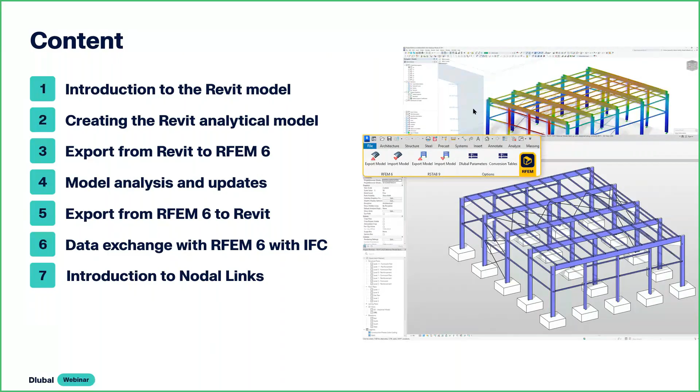Now I'll switch over to Revit, and here is the model I've prepared. It's a basic steel structure consisting of steel frames with some coupling members and some X-bracing. For my columns, I have my cross sections - most are W shapes, with steel A992 assigned for the W shapes, and I have my X-bracing assigned.

This is the structure that you would create, probably from the architect. The plan is to help the structural engineer by exporting this structure to RFEM 6.

So to do that, first we want to go into the Dlubal tab. This tab, or our Dlubal plugin, is our direct link. This is what you will want to install after installing Revit. It needs to be installed manually, but once you do, you'll have these 6 buttons here.

The first 2 buttons are for exporting and importing the model between RFEM. Then you also have the same options but for RSTAB or other programs. And then you have these last 2 buttons - the main one is the conversion tables.

So I'm going to open up the conversion tables and go over these quickly. The conversion tables are what map the sections and materials between Revit and RFEM. Since Revit and RFEM don't share the same section names and materials, they need to be linked together, and that's what the conversion tables are for.

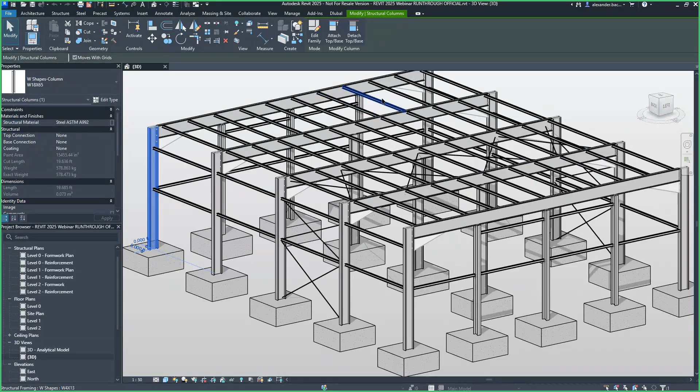So to do this, first we'll go to the Analyze tab. And under the Analyze tab, there's a button called Analytical Automation. This is what's going to help us create that analytical model.

Here you can see the first option is we can go from an analytical model to a physical model, or we can go from a physical model to an analytical model. This is the option we want to go with today.

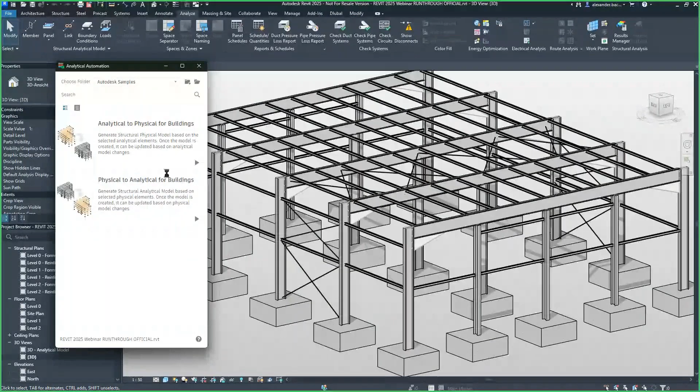So I'll click on that, and you'll see some additional options come up. The first thing we want to do is select what we want to convert graphically, so I will select that graphically in Revit. Now that that's selected, we have a next option here.

This is a tolerance. Right now with this custom tolerance, basically if a member is within this tolerance, then it will be connected - the analytical member will be connected within this tolerance. This is based off of a length, and my units right now are in feet, so this is 1 foot.

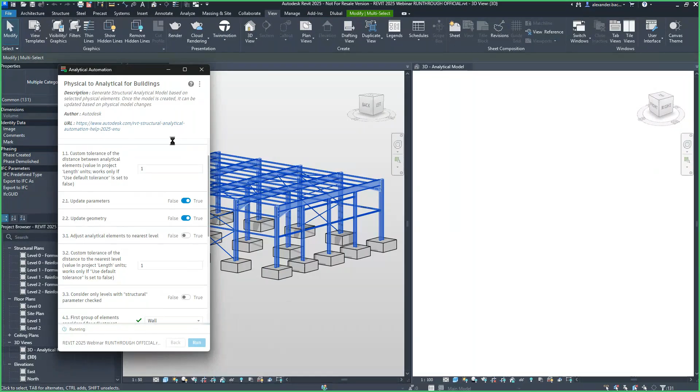So let me also open the analytical model and put them side by side. Let's run this to see what 1 foot looks like. I've created - you can see the analytical model based off that 1 foot tolerance has been generated.

You can see that my coupling members here connected to the beam because they're within that 1 foot. You can also notice some other members have done the same. If we change this to something like 0.8 feet and run it,

now you can see that those members have straightened out and everything looks better, but you'll notice that my coupling members are still kind of floating here, and some of these other members aren't completely straight. Also I have this cantilever at the end of my column as well.

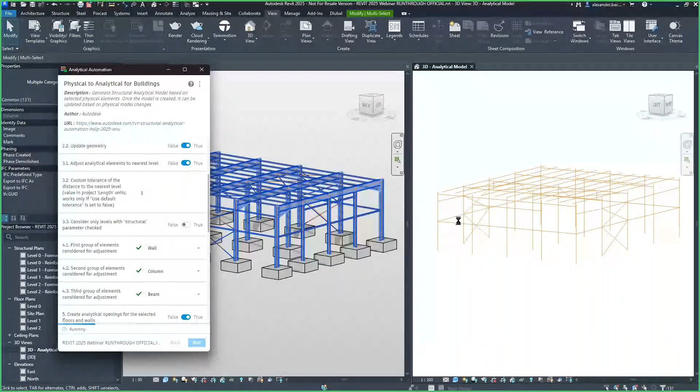So there's another option we can use to fix that, and that is the adjust analytical elements to nearest level. Once I turn that option on and run it, we'll see what that looks like. That'll adjust all the members to the levels that are created in Revit.

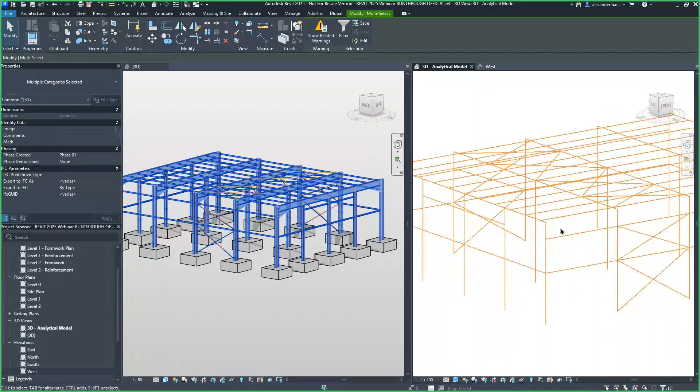For example, if I look at the west view, all of the analytical lines will now be adjusted to these levels. So now everything looks better - everything is straight and all of my members are connected and everything looks good.

The only issue with this is now it's not super optimal because my analytical lines are now resting on the flanges of my beams, whereas I would like these analytical lines to be in the center of my beams.

So what I can do is there is another option that can help with this, and that is called consider only levels with structural parameter checked. I can check this on, and all of my analytical lines will adjust to any level - if I click on one of these levels, any level that has this structure option turned on.

So what I'll do to utilize this option is I'll create some copies of my levels and activate that option. This first level, I'll just go through, create a copy, and then I'm going to move that copy down like so.

And with that copy, I'm going to rename it, and check on the option structural. Then I'll do the same thing with this level: create a copy, move it down, rename it, and check on that option.

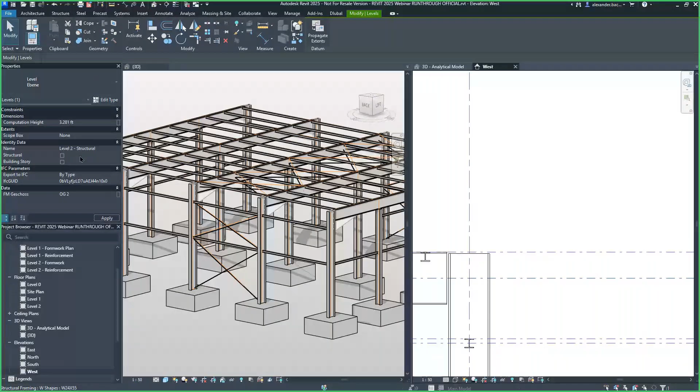Okay, so now once those are created, we can open that panel back up, and we can turn on consider only levels with structural parameter checked. Now this option does also come with another tolerance, so let's see what it looks like.

For example, if I exaggerate that tolerance, we can see how the tolerance works. So if I turn that on, you can see that members down here have been sucked up into this level, into this level, because they're within that 10 feet that I entered.

So that's not a great value. So what if I do something too small? Now you can see that my coupling members didn't get into the level. Some things aren't in there.

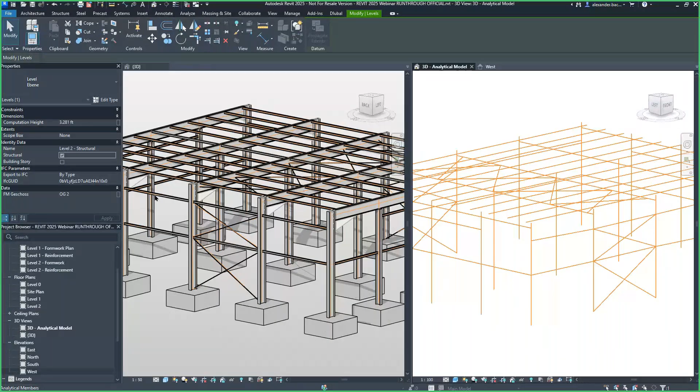So the best thing to do, well, one is the good happy medium, so we'll run it with 1 - that's how that tolerance works. And so now our analytical model is created, and you can see that my analytical lines are within the center of my beam.

Everything is connected. All my cross bracing, they're all meeting at the same joints and everything. So that's how you can create an analytical model within Revit using that tool.

Now that we have our analytical model, there is other model data you can add, like boundary conditions. If I go back under Analyze and Boundary Conditions, I could add in some point, line, or area supports in my analytical model. I can also add in loading, like point loads, line loads, and area loads, along with load cases and load combinations.

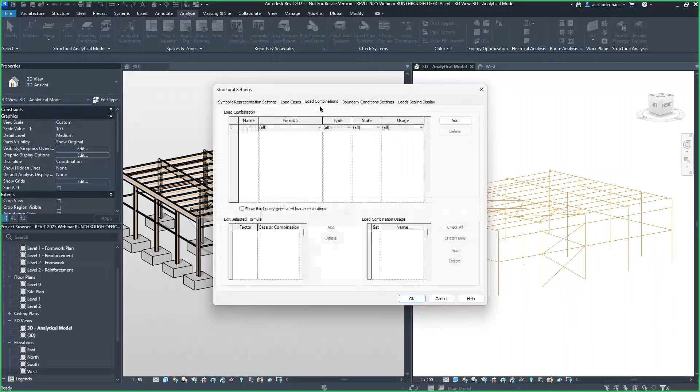All of this info can be carried over into RFEM. So if you wanted to have your Revit model be your all-in-one model, doing your architectural detailing and also running the structural info, you can do that. Or you can simply leave it up to the structural engineer and export the analytical model into RFEM. It's totally up to you.

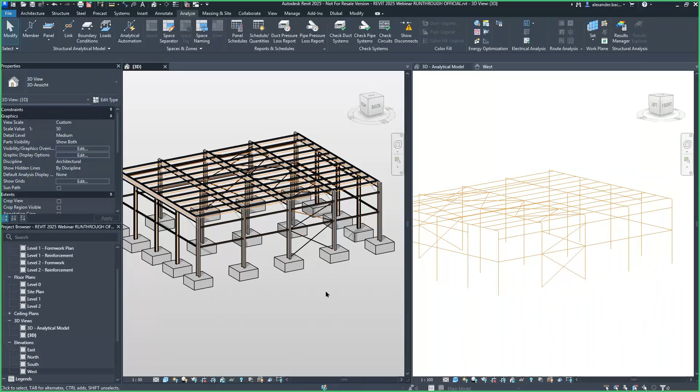So now we'll go over exporting this to RFEM. I'm going to move my windows over, go up to Dlubal, and go to Export Model. We want to export this model to RFEM 6.

You can either create a new structure and have RFEM create a new file and import the model in, or you can overwrite an existing structure. I'm going to create a new structure and have RFEM create a new file.

On top of that, I can also have RFEM open up a previously saved template. I have a template I've created from a previous model, and it's really easy to do when you have the model you want to use as a template - it could even be a blank model. You go to File and then Save as Template. Then all you need to do in Revit, or in the Dlubal plugin, is point your computer to wherever that file is, wherever that template is saved. So now when it opens a new file, it'll open that template instead of a completely blank file. That's great if you want to save things like load combinations.

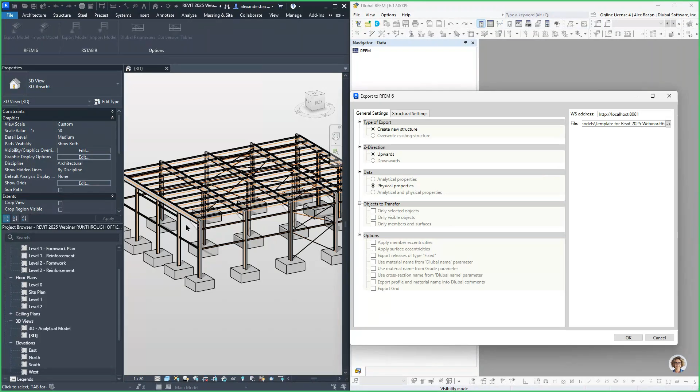I can also set the Z direction to upward, which is what I'll keep it as. You can choose between the analytical, physical, or both to export. I'm going to choose the physical - the physical model and the analytical model in Revit can have different model data, like different sections or materials compared to the physical. I'm going to choose the physical because it keeps the member rotations correct, which is good.

For objects to transfer, you could only transfer selected objects if you like, or only visible ones, so you can play around with that. Lastly, the grid can be exported, but I'm not going to.

Second tab is structural settings - I'm exporting model data. You can export the loads like I said, but I don't have any defined, so I'm not going to. Once I click OK, that'll start the process of exporting. This is where Revit and RFEM communicate with each other via API. This is a good time to mention that both programs need to be installed on the same PC - this is a requirement of the Dlubal plugin.

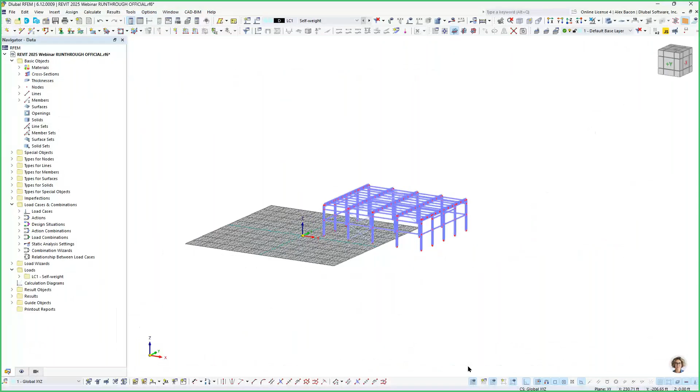Now that the export is done, we can see the model over here in RFEM. The model has been imported, and the first thing that's always good to do when you first import a model is check it visually - make sure your materials have been correctly mapped over along with all of your sections.

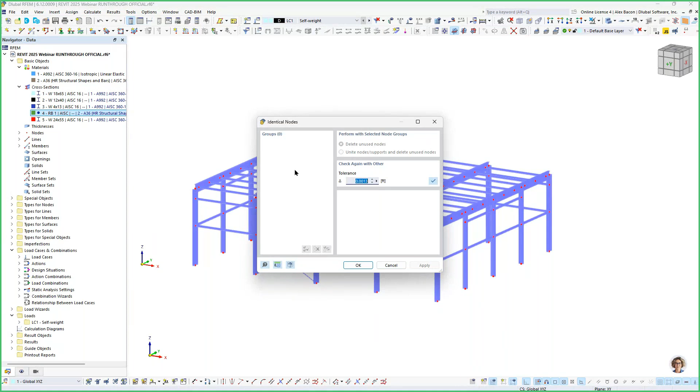There are also tools within RFEM that can help you do some model checks. If we go up to Tools, then Model Check, then Identical Node, this can check for identical nodes within this tolerance. If there are any nodes, more than one, that lie within this tolerance, they'll show up here. For example, if I type in 5 feet, you can see what that looks like and how it detects the nodes, and then you can choose what you want to do with those identical nodes.

The other tool we have for model check is overlapping members. So we can also check for overlapping members. I don't have any, but that's always a good thing to check for.

Now with this model, what we want to do is prepare to run a simple self-weight check, or self-weight load, just so we can check the results.

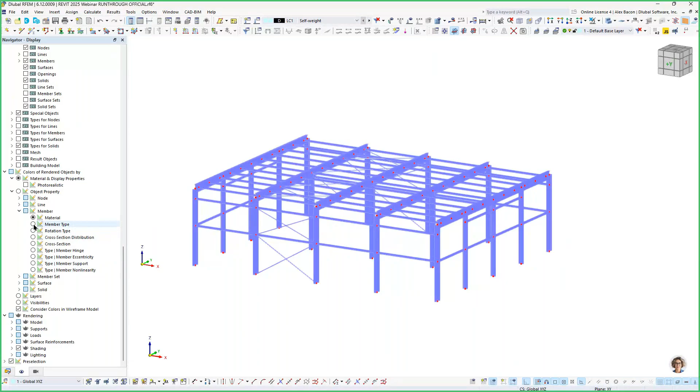To get a better understanding of the structure, I'm going to render it according to the section views. So I can go to cross-section and get a nice view of each of my cross-sections, which are color-coded. You can change the color of any of these. That's a good render.

We can also render it according to member type, so I can see all of my members are set to beam. Another good one is member hinge, so I can see that I don't have any member hinges defined. So all of my connections right now are completely rigid, with all 6 degrees of freedom.

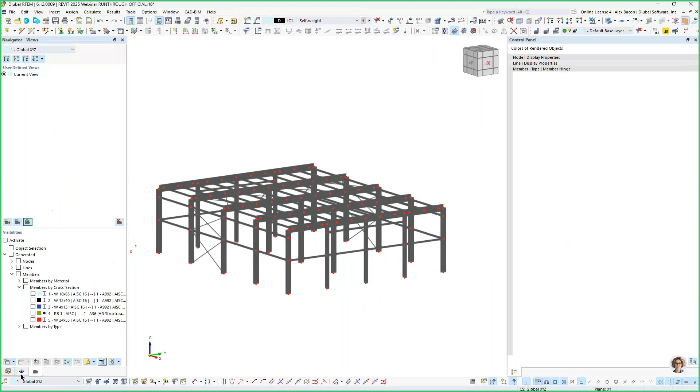Now I would like to edit some of my member types. I'm going to go to my views, change this back to member type, and isolate my cross bracing. I'll highlight all of those and change them to tension, so now these members can only take tension forces.

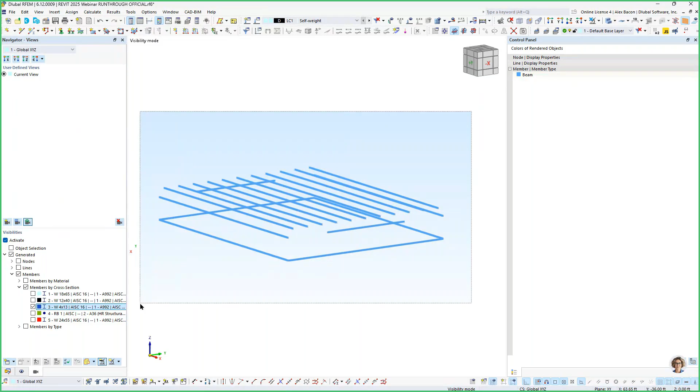Next, I want to change all of my coupling members to truss. I'm going to highlight all of my coupling members and change them to truss, so now those members cannot transfer moments. They have a pin connection.

Lastly, I would also like to apply hinges to my wall and center columns, so I'll create or show those. I only want to apply some member hinges since we have pin connections here at the top of my columns. I just realized I forgot to mention the connections.

Yes, I have some connections defined in Revit. For the columns and beams, I have some plates and fasteners, and the columns framing into the beams here are pin connections, so I'd like to consider that in RFEM.

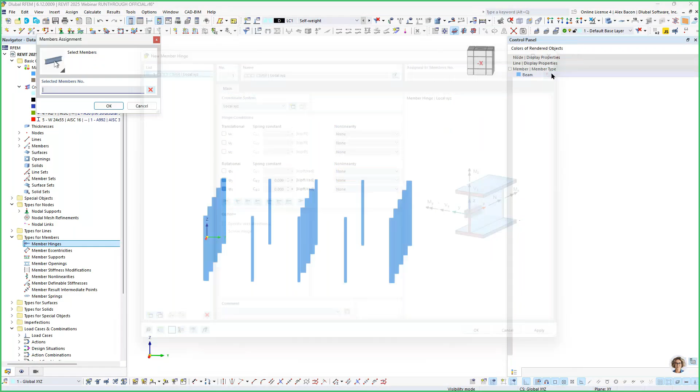So I'm going to go to the data navigator, go under types for members, and double click on member hinges. I'm going to create a new member hinge—it's a moment release. Then I can simply assign these member hinges to the tops of my members here and click OK again.

Now you can see those white pins at the top, telling me I have member hinges there. Under the member hinges display, you can also see what that looks like with member hinges assigned.

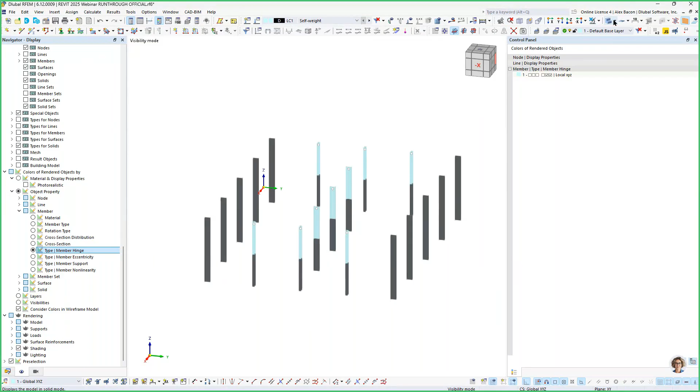Lastly, before we can run the calculation, I am going to exit out of this view. I also need to add nodal supports to the bottom, so I'll create or assign a nodal support, a hinged one, and highlight all of my nodes there.

So now this structure is ready to run a self-weight load case. I'm going to run the calculation.

And it's done. So now the best thing to do is check the deformations—deformations really tell you a lot about the structure, and right now ours are looking good. I can change this to colored section and a wireframe render. Right now we're getting a max of 0.07 inches, which is in our coupling members.

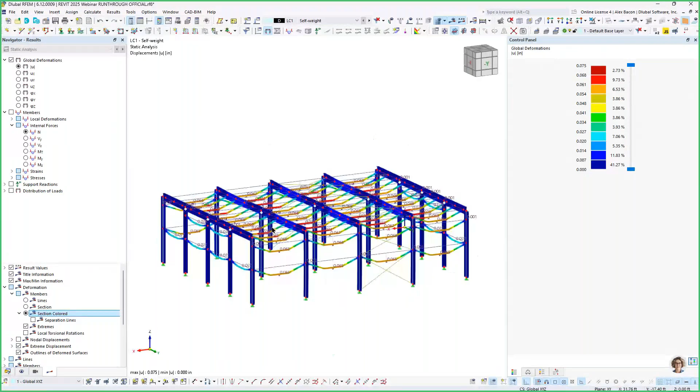We can also check the member internal forces, like the axial forces on the columns, and the moments on our frames here. I can isolate those and get a better view. We can see we get positive moments within the center spans and negative moments where our columns are framing in, so it looks like everything is good and correct with our model.

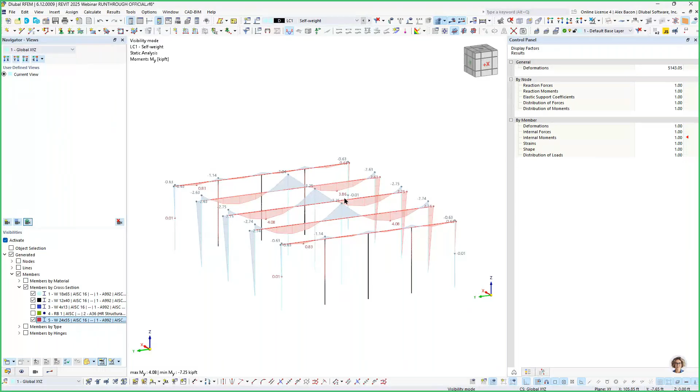That's good to see. Theoretically, the next steps for this model would be to add in some more load cases and loading, have those load combinations created automatically, and then run through the design with our design add-ons. I'm not going to do that with this model today to save time—I would like to move forward and import this model back into Revit.

So let's say you ran the design and you changed some section sizes or materials, and you want to update that in the Revit model. It is possible to simply update sections or materials within the Revit model, but if you made any geometrical changes, you would want to simply import the whole model back in.

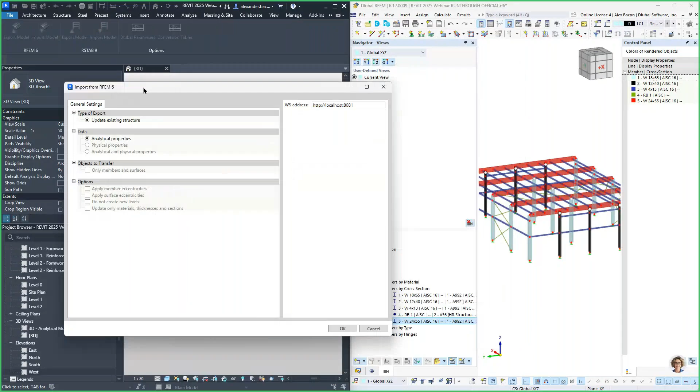So I'm going to delete my Revit model and go up here to import model. Again, we want to update the existing structure. We can't create a new file within Revit automatically. You can import the analytical model, the physical model, or both the analytical and physical properties.

I'm going to choose both. There's also an option if you only want to update materials, thicknesses, and sections, so that option is there if you don't want to wipe or delete the model in Revit. And now I can run that import.

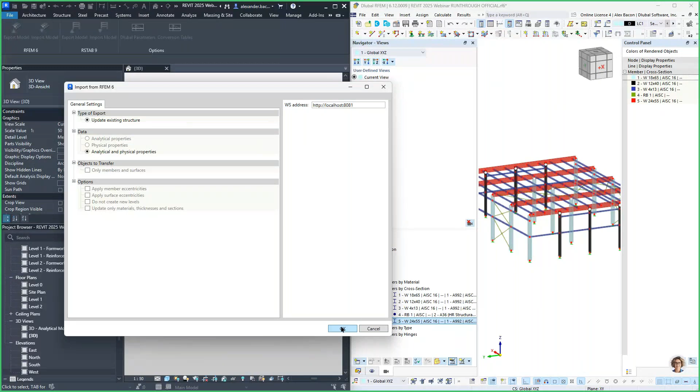You'll see the status down there in the bottom left of RFEM. This window is what it'll look like if you don't map every section in the conversion tables within Revit, and this will simply come up. So it's saying that my cross bracing section is not mapped to anything.

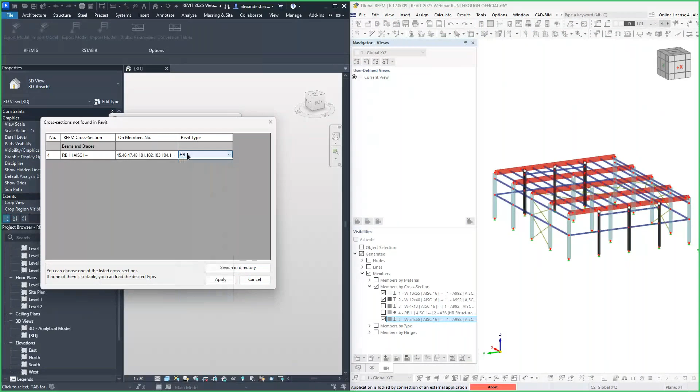It's really easy though—any of the families you have installed, you can simply go down, choose that section, and hit apply to map them there if you don't have them in the conversion table.

So the import has succeeded, and you can see we have imported both the physical and the analytical models. It's great because if I show the analytical model, I have my nodal supports in there automatically from RFEM.

So all of that model data in RFEM can be saved in here. I can even check my members, and I can see my member end conditions—those hinges, even from the truss members we defined, come in. You can change the degrees of freedom for these supports if you wanted to here. That's all the info that comes with the analytical model.

So that's basically the double link—that's how you can use the double link to import and export models and analyze them between Revit and RFEM.

So next, I would like to go over the data exchange using IFC.

Often Revit and RFEM 6 are not being used on the same PC. As far as we know, Revit cannot simply export the analytical model via a shared file extension, so therefore we can just focus on the physical model and export that in the IFC format.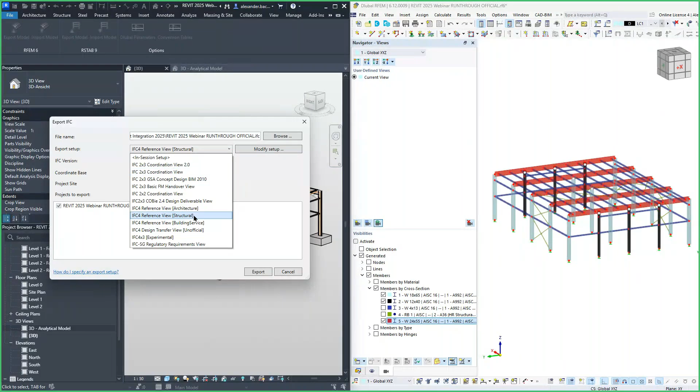So let's open up File, go to Export, and hit IFC. We can choose where we want to export that IFC on our computer, and then choose which IFC version or type we would like to use. Right now we just support IFC 4 reference view and IFC 2x3 coordination view. I'm going to choose IFC reference view and run that export.

It's pretty quick. Now I can go to that file on my computer and open it up in BIMvision.

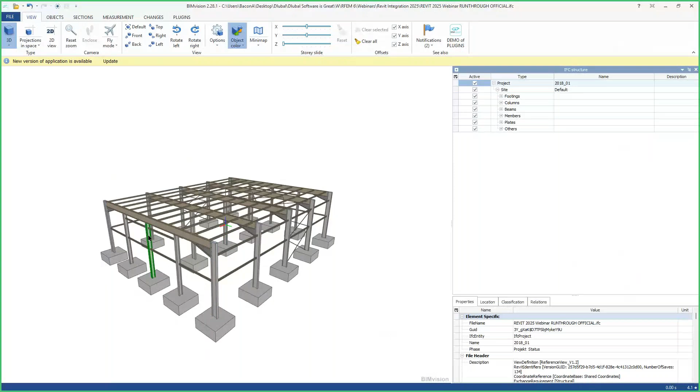Once open in BIMvision, everything comes with it—all of my connections are here. I click on a member and I can see every member comes with the section that was assigned to it, along with the material. So all of that info gets transferred through the IFC, which is great.

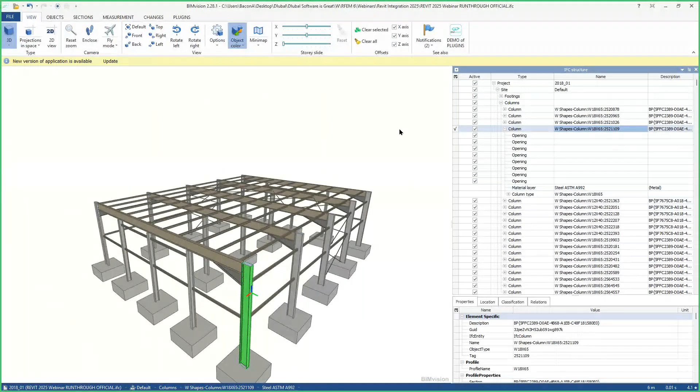So now I would like to import this into RFEM 6. I'm going to open up RFEM 6 and go to File and create a new file. Then I'm going to name this file IFC import Revit, click OK, and create that new file.

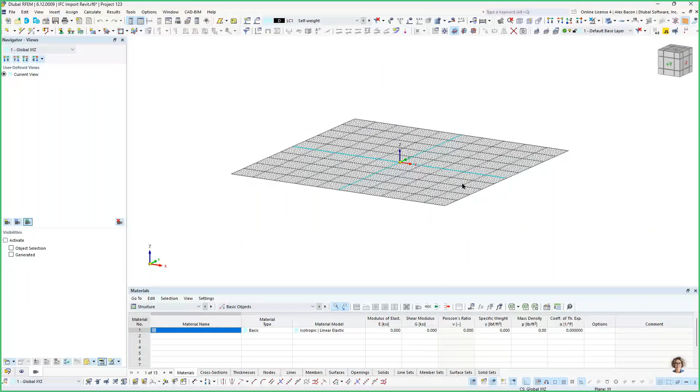Now I can go to File, Import, and Import IFC. I'll choose that IFC I just created, click OK. You can check or decide what coordinates you want the model to be placed on, and now that IFC model is within RFEM.

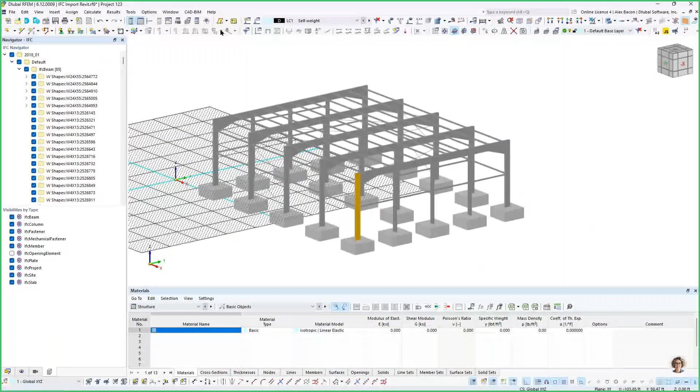So what we can do now—you can see I have all of that IFC info on the left-hand side here. I can even click on a member and turn on my IFC properties panel on the right-hand side, and you can see all of that IFC info comes with it: the section name, also the associated material. So materials and sections come with this, which is great.

And right now though, the problem is that these are just IFC objects.

If I go into my project manager or data navigator, you can see I don't actually have any RFEM elements. I don't have any members or anything.

So what we need to do is convert this IFC model into an actual RFEM model, and to do that, we also have a conversion table with RFEM.

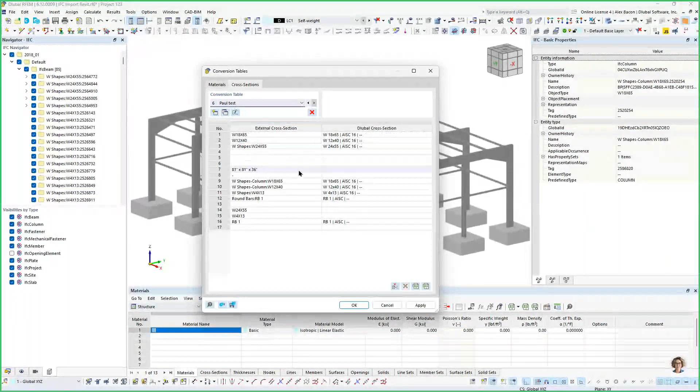If I go up here to CAD BIM and open my conversion tables, we have the external name here along with the Dlubal material name, and under sections, the same thing. It's really easy. You don't have to set this up, but if you don't, you have to assign these sections and materials manually.

But it's really easy to set this up. With this cell, you can use this graphical button to select the section or material name within the IFC properties. You can type it in manually, or create an XML file and save it to share with colleagues. And you only have to do this once.

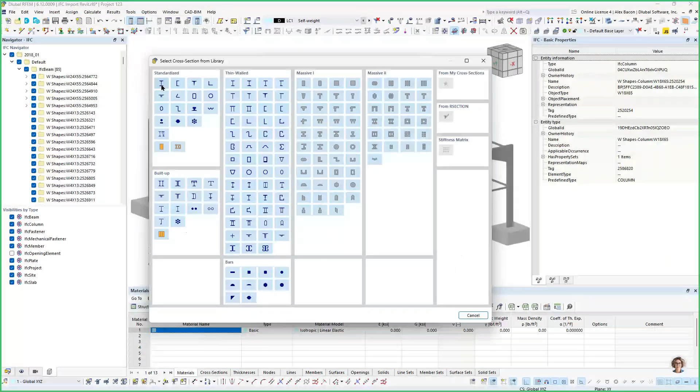So it's really quite simple to set up, and you can have multiple conversion tables. So I set this up, and in this cell you can simply go into the material or cross-section library that RFEM has, and that's how you get the name. You don't even need to know the Dlubal name. It's pretty simple.

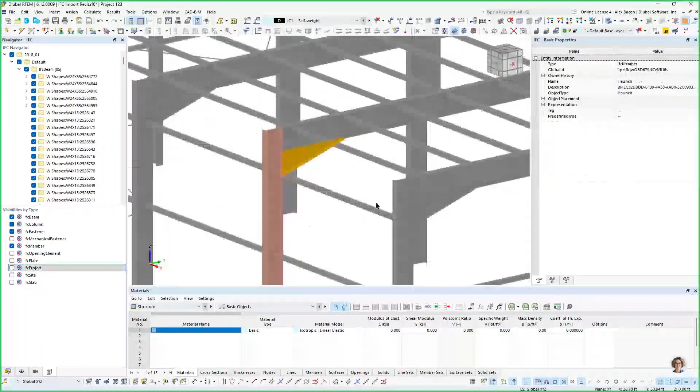So I have that set up, and now what I can do is hide these IFC elements I don't need anymore. We'll hide the connections and fasteners. You could convert these connections and fasteners, or probably mostly just the fasteners, into straight elements if you wanted to, but it's not really practical, so I'm going to hide all of them.

I can't hide these end plates here because they're linked to my cross bracing. That can be changed in any IFC file, but for mine, it's a little bit different. So I'm just going to hide my plates here, like so.

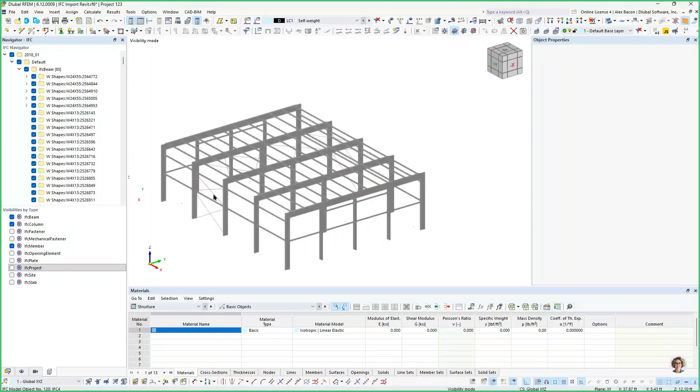So now we have just the members we want to convert. I can simply highlight this whole model and right click on one of the elements. You'll see we have a couple options for the IFC conversion: convert into straight or curved members, convert the element into a surface, or convert it into a solid. I'm going to convert it into a straight member.

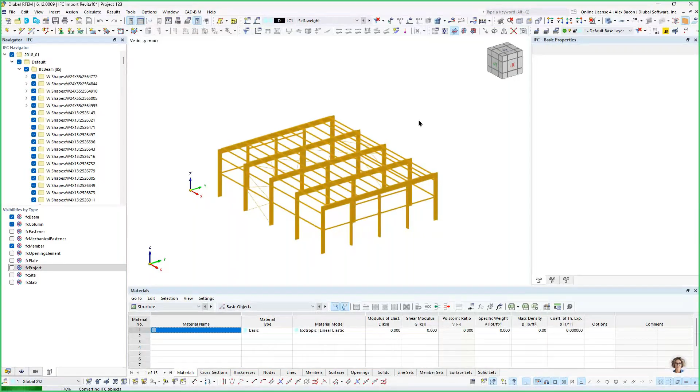So now all of my members have been converted. All of my sections, again, are mapped to the correct members along with my materials. So now I can hide all of my IFC elements, and we can just work with the model in RFEM.

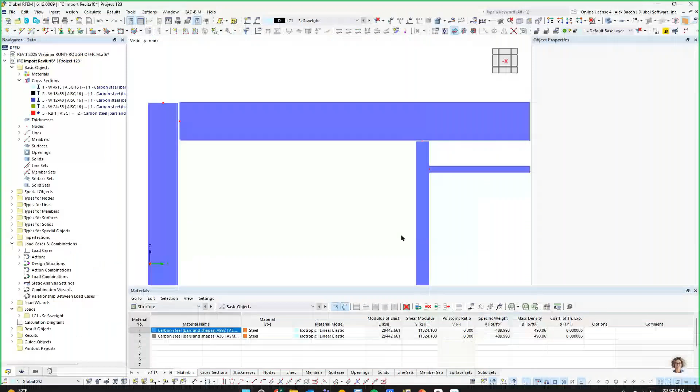Now, the issue is that we still have the gaps here. Everything is laid out the same as it would be in the IFC model, so that gap there is because we had the plate there, and all of those gaps are going to still be there. That means if we change this into a wireframe view, none of our elements are actually connected in the eyes of RFEM. Everything has that space, that eccentricity, which can be a bit of a blessing and a curse, as you'll see.

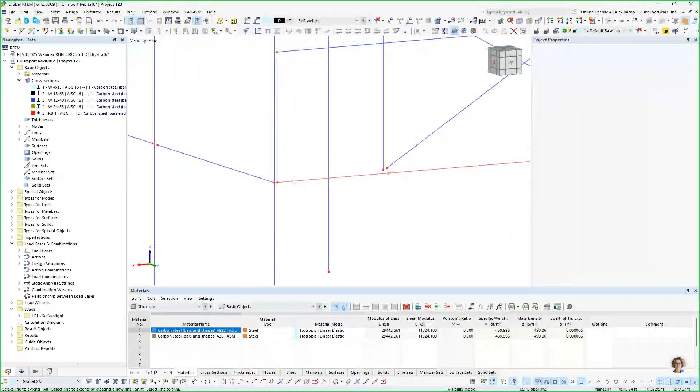But there are a couple of ways. The next steps would be to connect these elements. The first option would be to use the tool down here called Extend Lines Graphically. If I click on that, it'll essentially extend the lines, and they have to be in the same plane, but it'll extend them and connect them like so. You could go around and connect elements like that.

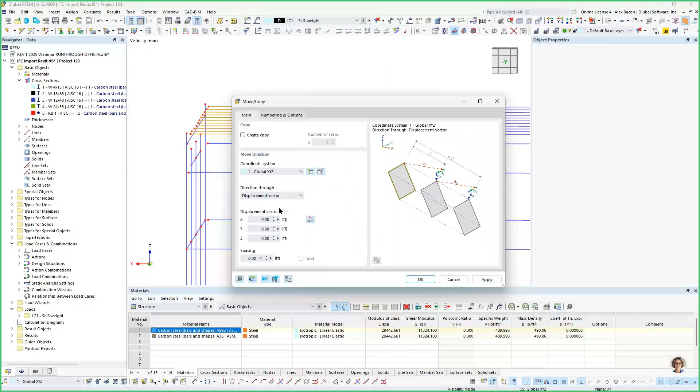But the issue with this option is what do we do with these coupling members up here connecting to my beam? They're not in the same plane. What you could do is select them and go to the move/copy tool, and simply move these elements into the same plane, like so, and then use the extend lines tool to extend them and connect them to the beam.

So this is the first option. You can use the extend tool and connect everything, going around. But what I want to show is an alternative to this.

And the alternative is an object we call nodal links. So if I go under my base or navigator, data navigator here, and go under types for nodes, I can double click on nodal links. And this is what the nodal links dialog box looks like.

So basically, we can assign these nodal links to nodes. And once they're assigned, those nodes will look for other either nodes, members, or surfaces within this search radius here.

And so, yeah, you can set the search radius to anything. Then there's also the search method. Right now it'll just search for the closest objects. In the future, we are thinking about adding other options to include here, but currently the only method is to search for the closest objects.

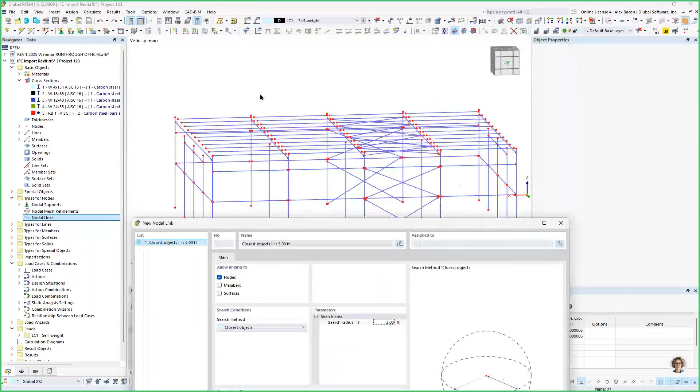So with that said, now I would like to create some nodal links. The first nodal links, I'm going to connect my beams here of my main steel frames to the columns. So I'm going to uncheck nodes and check members.

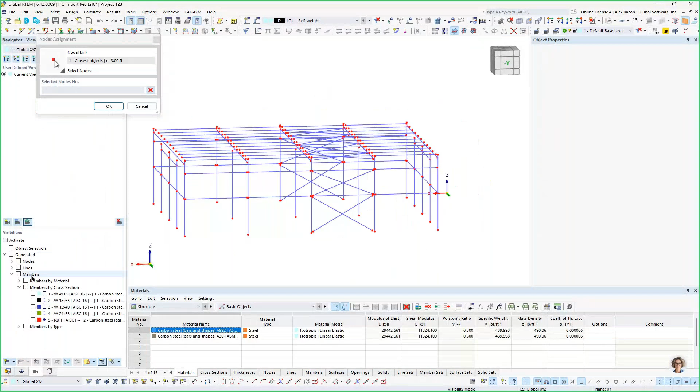And then I'm going to go up here to assign to, which is where we'll assign or choose the nodes we would like to assign. I'm going to create a visibility of just my beams and my columns. And then with this button, usually this is turned on, called ignore related objects, I'm going to turn that off.

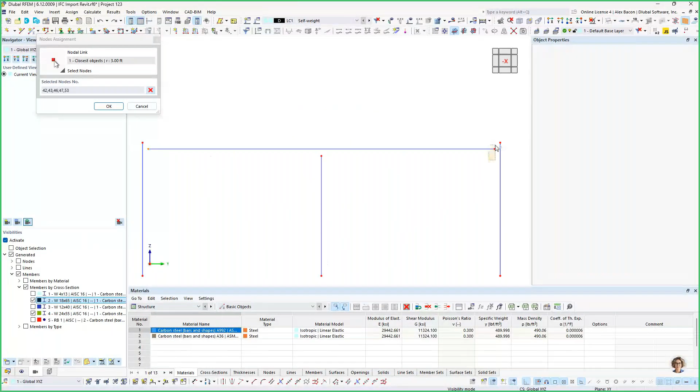So now you can see the nodes. I'm going to switch my view around and simply choose my nodes here at the end of my beams. So now those are up there, all the node numbers. Click OK. And now you'll see that those rigid links have been created between my beam and my column, connecting the two.

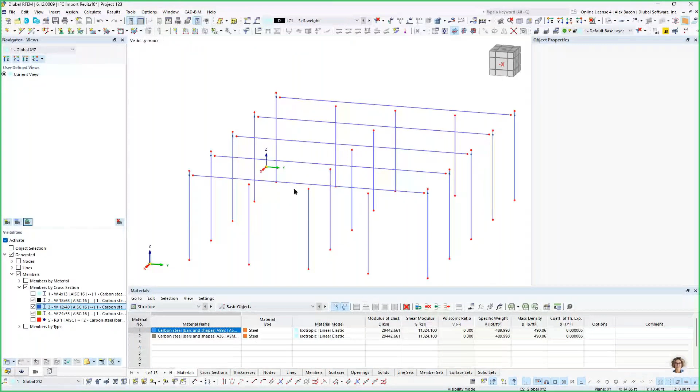So now my columns and my beams are connected. I would like to do the same thing for my other columns. So with these columns that are supporting the beam here, we have again that pin connection. So we want to add the rigid links, or we want to add member hinges to the rigid links that we create. So we'll create another nodal link definition.

And when you create these, you can see them on the left-hand side here. You can name them so you don't get confused which one is which. But again, we want to search for members. And this time we want to add a member hinge in.

Now you could argue whether this member hinge should be applied to the top of the column or to the end of the nodal link. I'm just going to add it to the start of the nodal link.

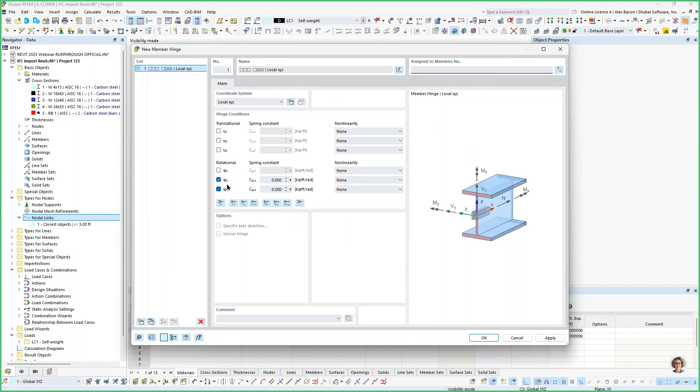And so now I have my member hinge definition. Rotation about the local Y and Z axes are released, so moment. I'll click OK, and then click OK again.

And I forgot to highlight the nodes. So yeah, we want to select our nodes. That's important. And click OK again. And now we have our rigid links with our member hinge here, releasing the moment connection between the rigid link and the column.

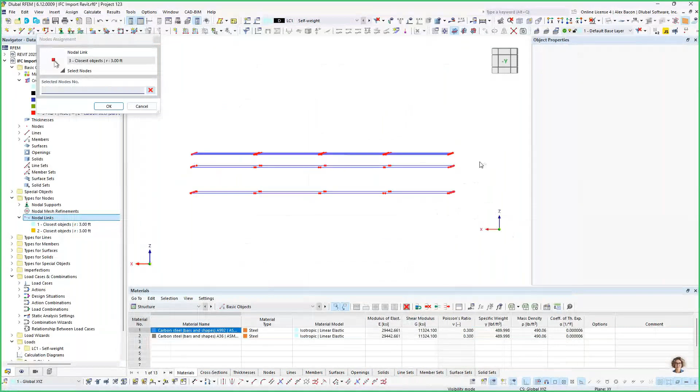And so now we want to do the same thing for our coupling members. I'm going to check on just only my coupling members. So let's create another nodal link definition. I'm going to select all of my coupling members and click OK. And now, yeah, I've created links for my coupling members to link to the columns.

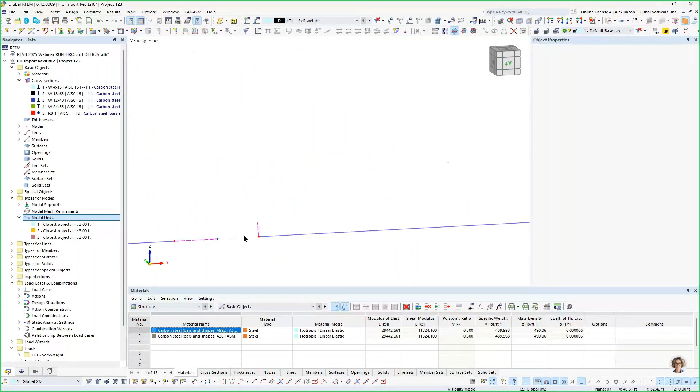So we can go around and double check that all of them are correct. Okay, so you can see here we have a little bit of an issue with this nodal link. Hopefully that's easy to see. If I activate or show hidden objects, you can see what the issue is. So my X bracing, the link is linking to the X bracing, which is closer than the node that's on my column.

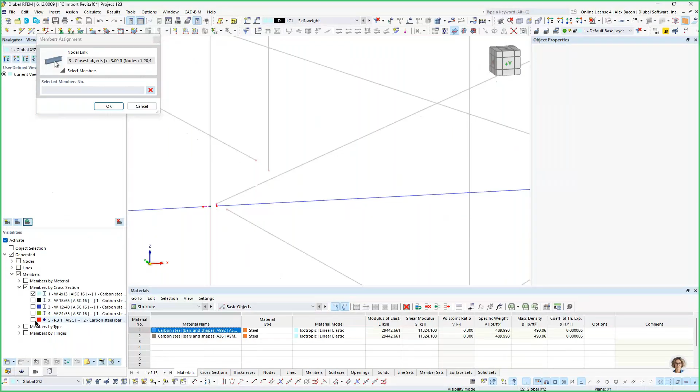And so this is where the option exclude objects comes in. So we want to exclude that X bracing, and I'm going to have to activate my X bracings and highlight that X bracing, click OK. And now that rigid link has gone to the column node instead. So yeah, that's one way to use those.

And I also want to do the same thing for the coupling members up here. I don't need to create a new one. I could just include these coupling members within the same definition. So I'm going to highlight those nodes.

I highlighted my X bracing as well, or no? No. There we go.

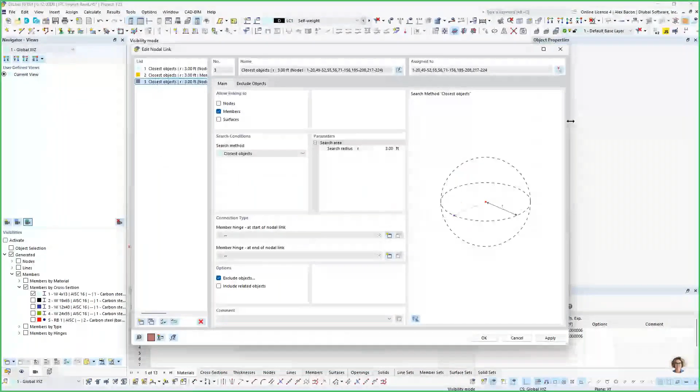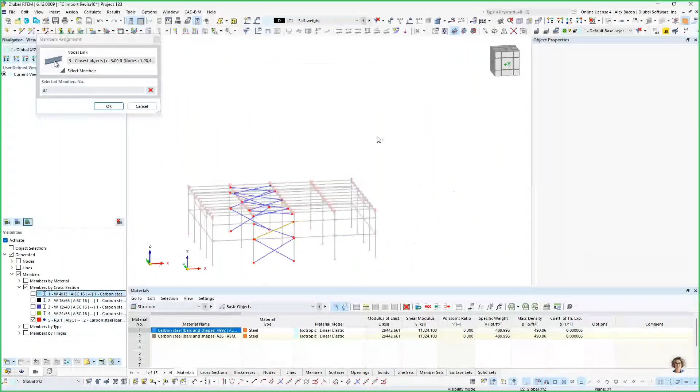I want those to also connect to the beams. You can see these are all good, except some of my coupling members are connecting to my X bracing. So what I want to do is exclude that X bracing from being selected. I'm just going to choose all of my X bracing to exclude from that nodal link. Let's double check. So yeah, all of my coupling members are now connected to my center beams here with that eccentricity and no longer connected to any of the cross bracing. So that's good.

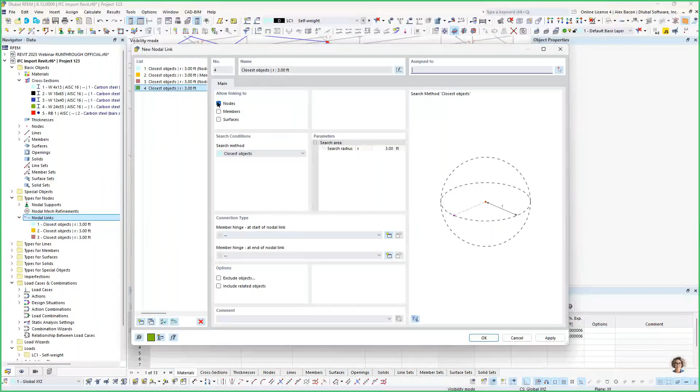Next, we want to do the cross bracing. We want to connect our cross bracing to the nodes on the columns here. So I'll create a new nodal link definition. This time we don't want to choose members, we want to choose nodes, because we want our cross bracing to all connect at the same node here on the column.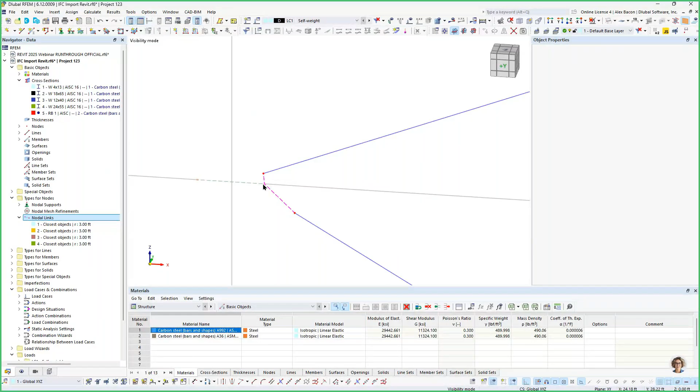We will choose all of the nodes for our X bracing, like so. Click OK. And now again, we're going to have some issues with the X bracing connecting to the closest node, which is our coupling members here. So we want to exclude the coupling members now from this definition. If I go back and hide my cross bracing and only show my coupling members, and exclude those from the X bracing. Click OK.

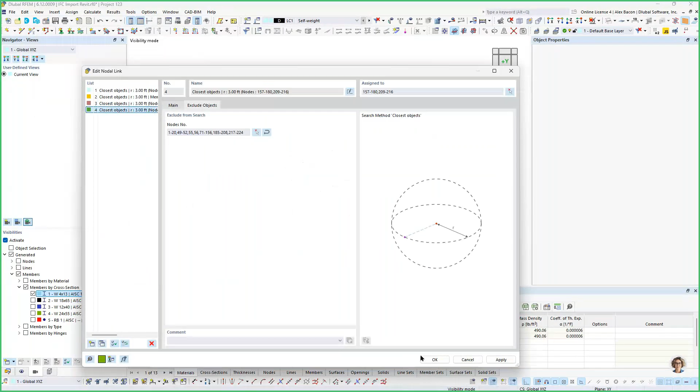If I cancel out of this visibility now, we can go around and see now the X bracing is connected to that same node there. Those eccentricities are there. All of the X bracing up here is all connected to the right node. It's all good. So now everything is connected.

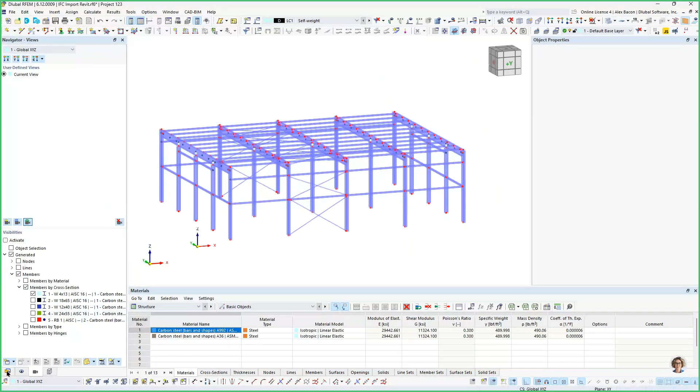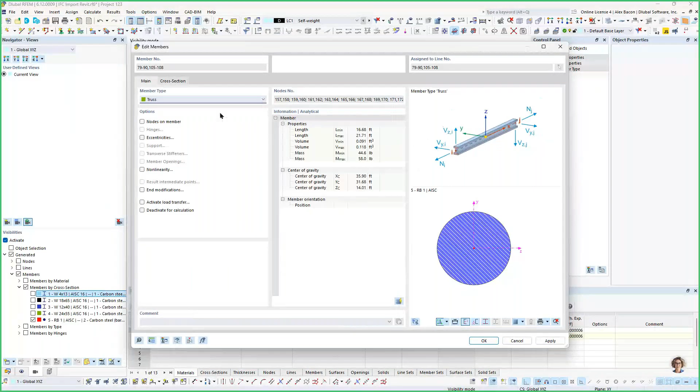And the last thing we want to do, just like before, is change some member types. I'm going to change this to cross-section or member type, and I would like to assign my cross bracing to the tension member type. So I can highlight those and just edit them and turn, whoops, not truss, tension. So now those are pink.

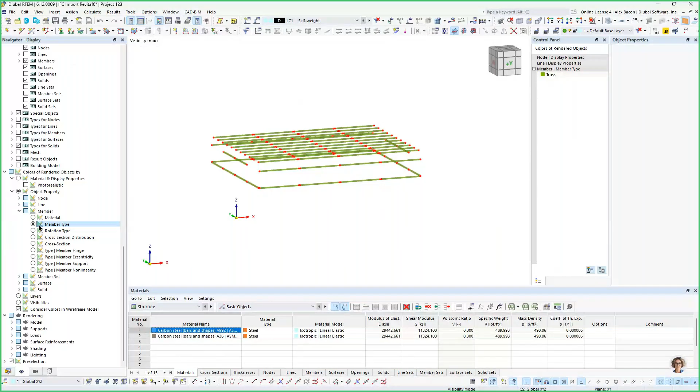I'll do the same for my coupling members. Double click on those and change them to truss. We don't need to add any hinges to our columns in the center because they already have those hinges defined. So we have our member types defined.

Now we want to add in again our supports, so we'll add in our hinge supports down here. Catch just those nodes at the bottom of the columns, like so. And now we can run the self-weight calculation and double check that our results look good. So we'll run that.

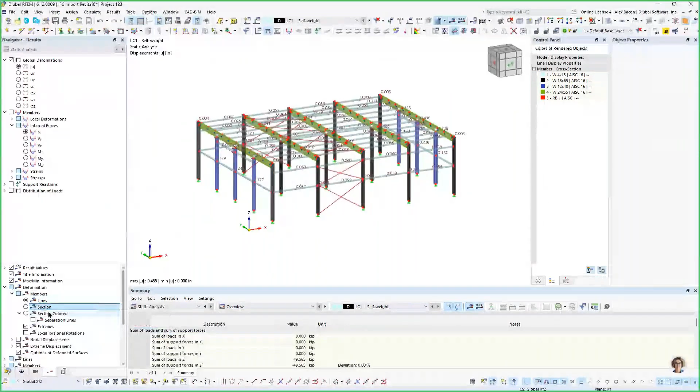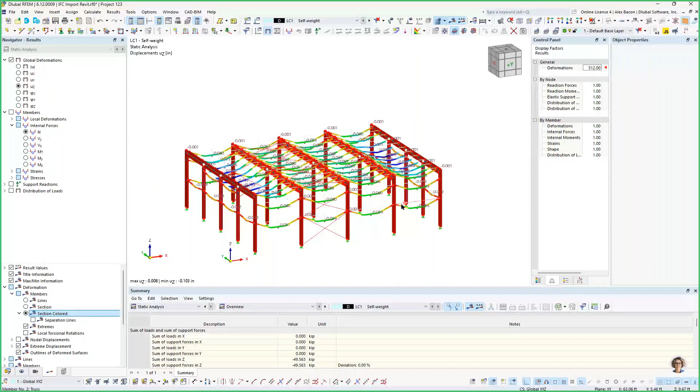And I'm going to turn on section colored. And there we go. Okay, so now we can see the deformations. We can see they're a little bit different now that we have those eccentricities defined. We have a little bit of torsion on our outside beams here. We can just check the deflection in the Z direction. If I increase the deformation here a little bit, we can see what that looks like, a little exaggerated, and it's similar to the analytical model. Only difference is now we have those eccentricities kind of, in essence, applied to this model. But the max deformation we're getting is around 0.4 inches.

So then we can also check our member internal forces. Again, we can see our axial forces, and we can view our moments again on our frames here. We're seeing our negative moments in the center where our columns are connecting, and the positive moments in the spans there, which is good. So yeah, this is comparable to the analytical file that we used with the Dlubal link, but instead we just imported this as an IFC.

I'd just like to give some additional info. We also have the same links now, but for lines. So if I go under types for lines, we have line links, and you can use these for walls and slabs, and they can be connected in the same way.

For future development, we are testing a tool that will allow you to create these links automatically, but it is not ready to be shown yet. Hopefully it will be released soon, so look out for this. If you're interested and want email updates on when this will be available, please feel free to contact us and we can provide those updates. You can also look out for development updates under your extranet account on our website.

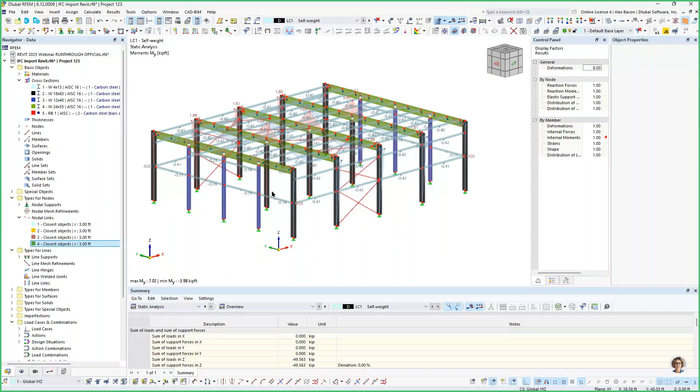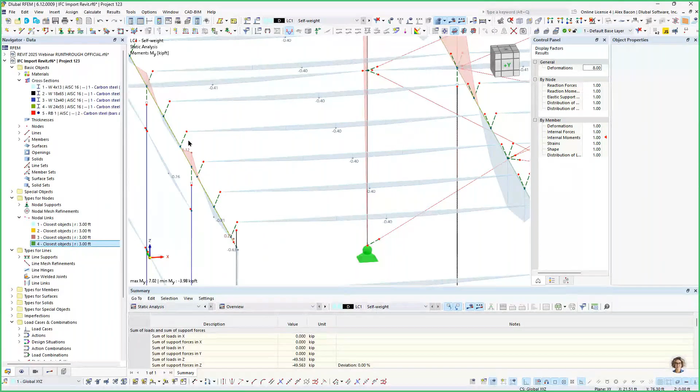You can also leave the beams basically where they are with these eccentricities, because these eccentricities would have had to be added in anyway. The benefit is that for the steel joints add-on, you would have had to add these eccentricities in anyways. And if you wanted to add a joint for the coupling members to the beams, you would have had to add that in anyways.

The additional benefit of the IFC file is that the BIM info is also saved within the objects. If I double click on one of these members, you can see we have this BIM tab for the member. All of that BIM info is saved here with the global ID, or GUID, and our cross-section and material is saved within there as well.

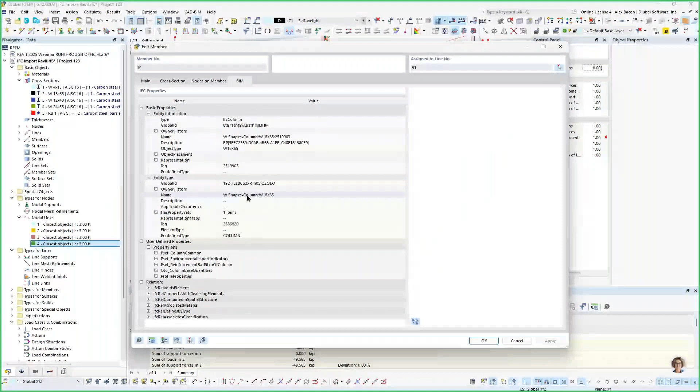So I could just export this. In RFEM, you can also export IFCs. We can go to Export, IFC, click OK. I'll just rewrite one of my files, and then I can go into BIMvision. I think I exported only that member I had selected - you can just export simply only selected members. So I'll save that again.

BIMvision - so I could just open that file. This is the file from RFEM that we just made. I can again click on the member and see that material info and section info saved within that file, along with the same GUID here. The good part about this is that because we saved that info in the IFC, we can use that info again, like I just did with the export. And the members, like I said, save the GUID.

This is good because it allows all of us to compare IFC files. If we have two IFC files where the GUID of the objects is the same, this will allow us to compare sections and materials, which is good.

In the future, we would like to include the export of our steel joints and reinforcement in the IFC format, concrete reinforcement in the IFC format as well. But this is something we are still working on developing. The goal is to have a properly looking IFC file exported from RFEM 6 with all of the proper information that is necessary.

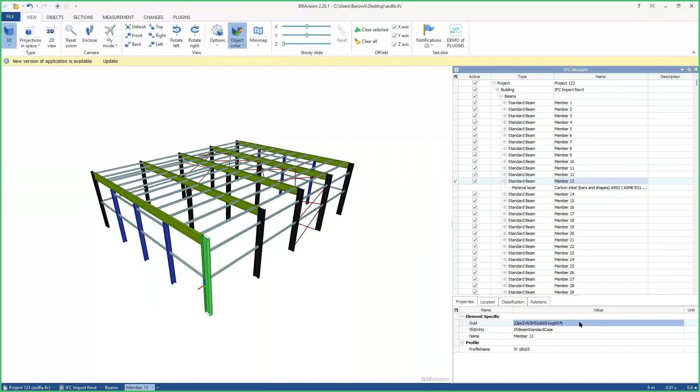So that is all of the workflows that I wanted to show for today. I thank you for attending and for your attention. I will hand it back over to Amy now.